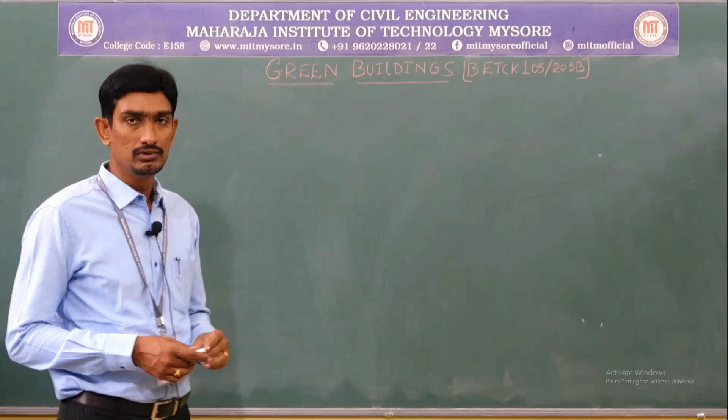Today I am here to discuss the course on green building, which is an elementary course in engineering that we are going to teach from our Department of Civil Engineering. In module 1, 2, and 3 of green buildings, we discussed the various materials to meet the green aspects, the various techniques adopted to meet the green environment in buildings, and the causes of global warming and critical issues related to it.

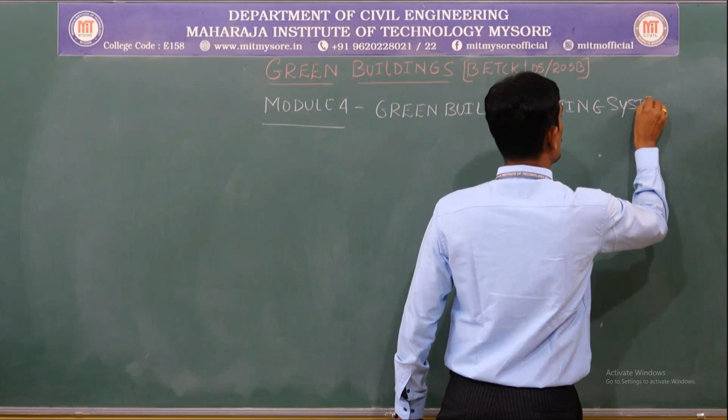Now, moving on to module number 4, this module deals with the green building rating system. In this module, I am going to teach you how to rate a building, or how we can say the building has attained the green aspects, and how to assess whether a particular building is reaching or attaining the green aspects or not.

So in this context, what are we going to discuss? Coming to the contents of this module, I will introduce what exactly the green building rating system is and how we need to attain it. Next, I am going to discuss the various assessments - what are all the rating systems or assessment systems available to assess green buildings. I will discuss this with respect to the Indian context and also the global context.

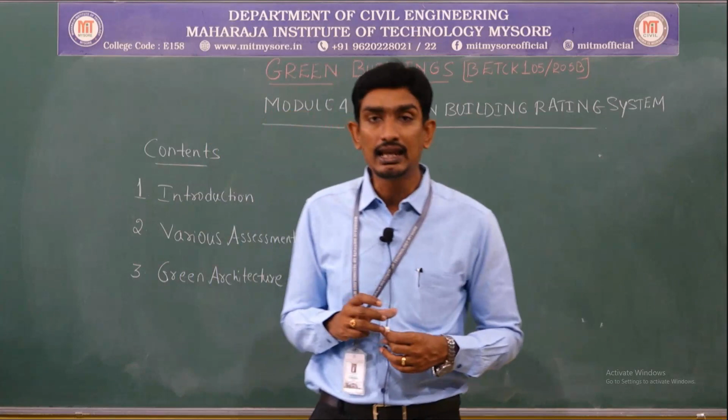Next, after this, I am going to discuss a very important aspect - green architecture. That means if I want to meet the green aspects or green environment in a building, or accommodate these principles in green buildings, how do I need to manipulate or modify my building to meet the green or sustainable aspects. These are the contents I am going to discuss in module number 4, the green building rating system. Let us go one by one.

So first, let me start with the introductory part, as I stated. For 4.1, module number 4, the first topic: introduction.

Hope you know that these days there is a lot of urbanization happening, and more construction is happening because of this rapid urbanization. The construction aspect is also increasing because village people are now moving to urban areas. Because of this movement, they need a basic need, that is shelter, and because they want shelter, the construction aspect is also increasing.

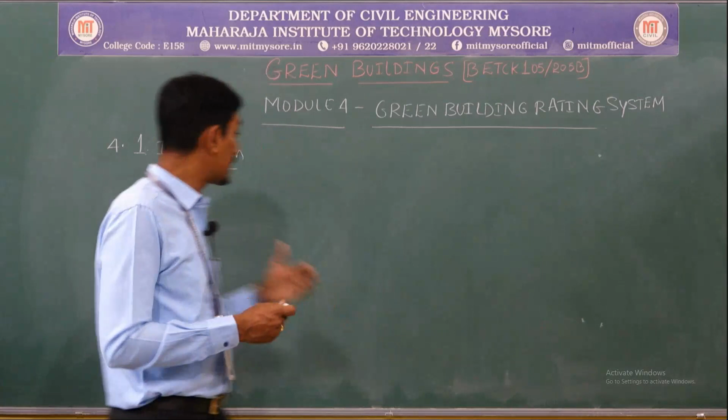Another thing is infrastructure-wise. Because of this rapid urbanization, infrastructure is also getting expanded. For example, take Bangalore - earlier there was no metro, no increase in the boundary area. Now you can see all this has increased - the metro has come, flyovers have come, and the area has increased, because of more urbanization and more movement of people from one place to another.

Because of this rapid urbanization, construction is also increasing. In this particular course, I am going to concentrate only on buildings. I am not talking about infrastructure, because as my course name itself says, it is green building - I don't want to talk about infrastructure, I will talk more about buildings.

So now coming to the building sector - as I told, because of rapid urbanization, the building sector is growing rapidly because of this urbanization. Buildings are increasing day by day, and more construction is happening.

This building sector is increasing rapidly. Because of this, it is contributing immensely to the growth of economy also. Because of this rapid increase in building sector, or rapid construction activities, the economy of a country is also increasing. So that is a good perspective or a positive point. This augurs well to the country.

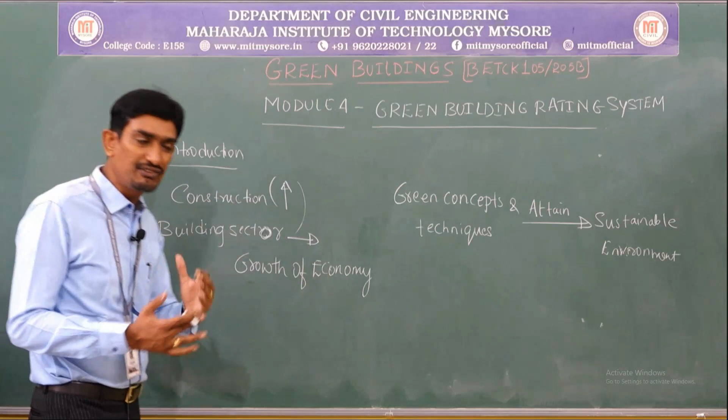Because of increase in building sector, the construction activity is also increasing. Because of this increase in construction activities or building, it will lead immensely to the growth of economy. This will augur the wellness of a country, which means I need to contribute more upon the green concept and techniques, which will attain the sustainable environment.

Now, what green concepts and techniques do I need to talk about? These green concepts and techniques need to address the more national issues. The national issues - what are they? That is, water efficiency, energy efficiency. So these are the national issues I need to address.

Not only this, the very important thing is reduction of fossil fuels, and handling the waste, and conserving the natural resources. So these are the national issues I need to address in order to attain this green concept and techniques, finally to meet the green building.

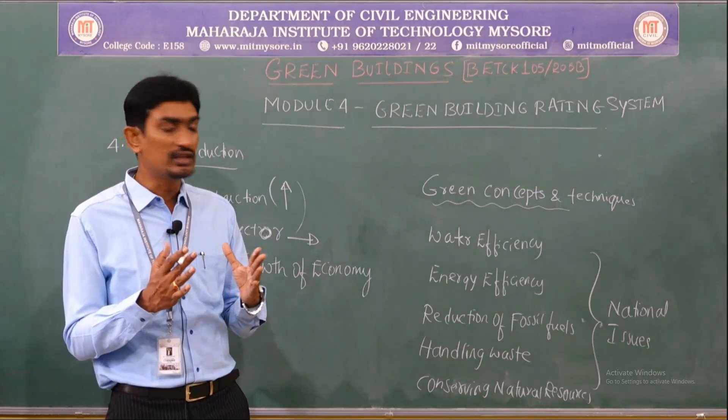Water efficiency is a major crisis now because in our home, how effectively or efficiently we are using the water - for bathing purpose, cooking purpose, washing purpose, cleaning purpose, we are using water. How effectively or efficiently we use this water plays a role with respect to national issues. We should not waste water because it is a precious thing we need to preserve for our future. So efficiently using the water is one of the green concepts and techniques we need to inculcate or adopt in order to attain the green building.

Next, coming to energy efficiency. For example, I will take a small example. In our household, we used to switch on the lights, fans and all. By switching on the light unnecessarily, it will be waste of energy. Simply we are wasting energy. So how effectively are you converting those?

What I'm trying to say is, nowadays, in order to meet the green aspects - I think they have been discussed in module 1, 2 and 3, especially module number 3 - inculcating or imparting solar energy in the building. That means converting solar energy to electrical energy. Converting solar energy into electrical energy conversion is one of the important aspects of how we can effectively use the energy.

By switching on the light, fan, we are consuming a lot of energy. So that's why how effectively you are preserving energy is very important. That is another issue we need to address.

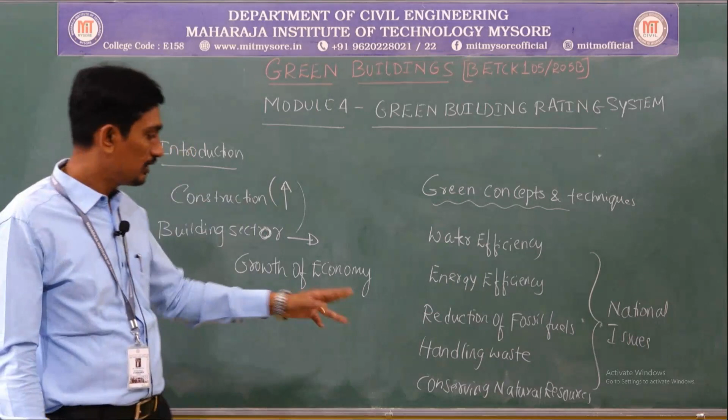Next is conserving natural resources. That means we need to preserve our nature. Then only we can showcase sustainability. Sustainability is defined as meeting the present demand without compromising the future.

With respect to the building context, we need to preserve stones and river sand. Nowadays in construction practice they are not using river sand, because it is a natural resource we need to preserve, otherwise it will lead to imbalance of the environment.

Likewise, we need to preserve the hilly areas, that means the stones. If we keep on doing the quarrying process, we are completely spoiling the environment. So all these things we need to think of and preserve. These are the various national issues we need to address with respect to these concepts. Then only we can attain the green building.

Because these are one of the criteria we are going to look at in order to assess or rate the green buildings. Anyway, I am going to discuss these during the assessment, but in general, these are the criteria I am going to look at in order to rate the green buildings. Is it clear?

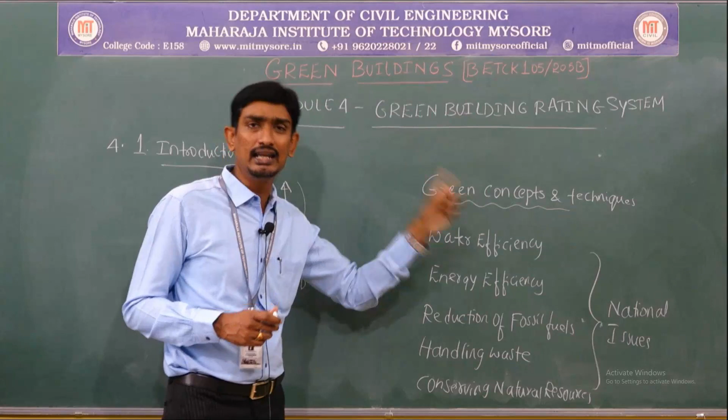So next, with all these things, now let me define what exactly green building rating systems or green building ratings are. So we need to define that. Okay, let me go ahead. Green building rating system. Green building rating systems — I use it as plural, that is systems, because so many systems are there. That's why we call it systems instead of system.

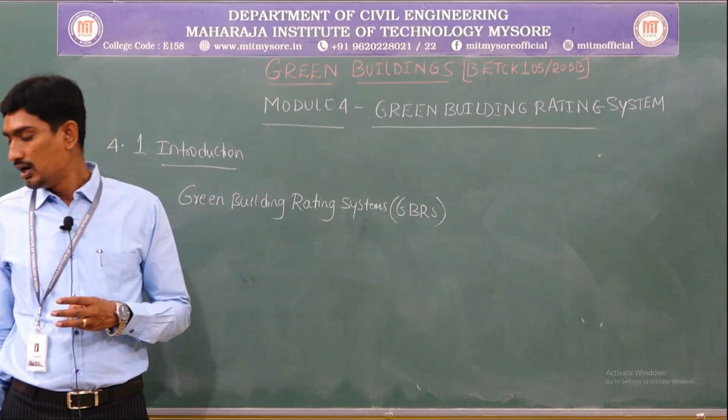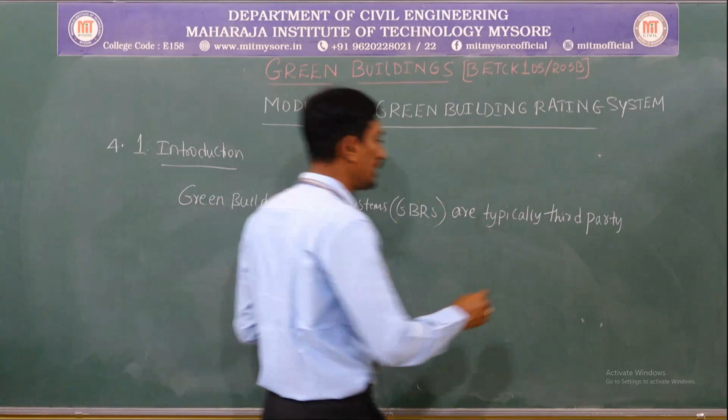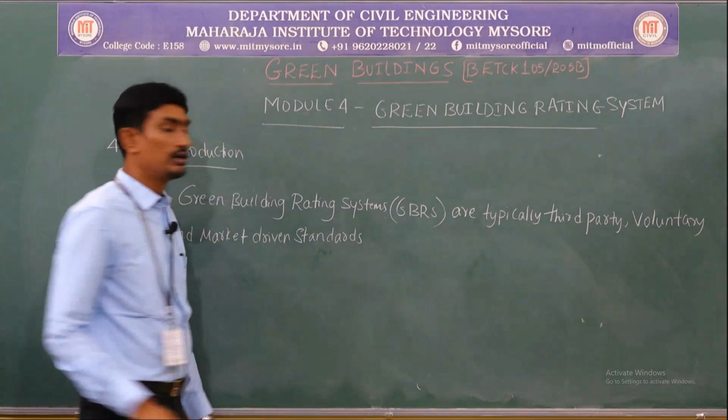So in short, GBRS, green building rating system. What exactly is it? Typically third party, voluntary, and market driven standards.

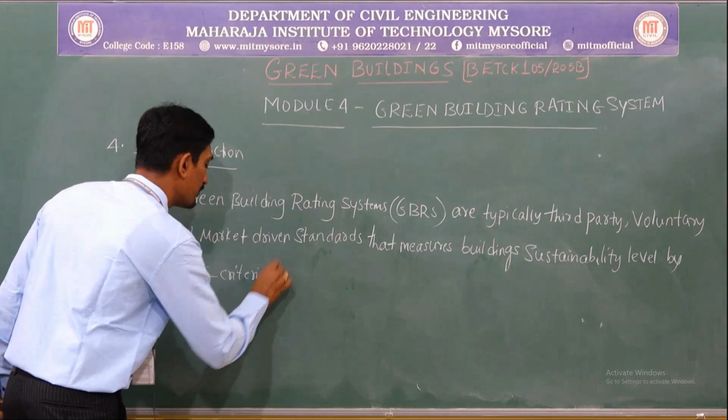Market driven standards that measure buildings' sustainability level, because the final aim is we need to measure the building, since we are only talking with respect to buildings, not any other structure. Buildings' sustainability level by multi-criteria assessment.

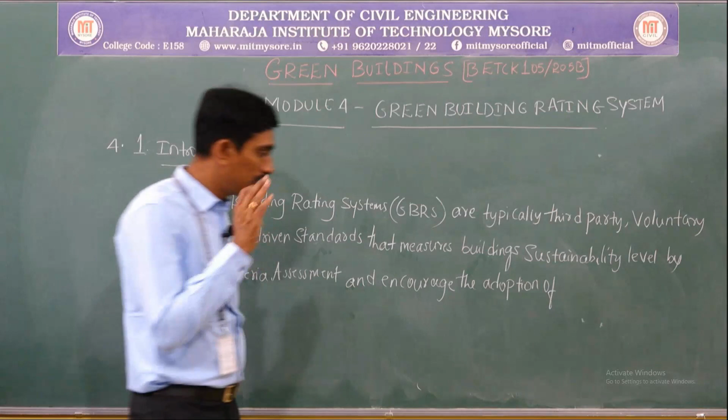It's a very lengthy definition: and encourage the adoption of the three triangles which we discussed in the previous module, that is sustainability — the adoption of environmentally, socially and economically sustainable practices, because these are the triple triangle. I think in sustainability we need to think of these: environment, social and economical. So when we want to attain the sustainable environment, we need to look at these three aspects.

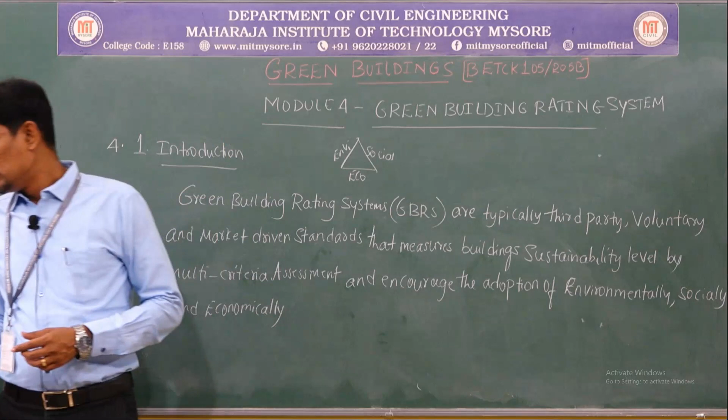So in social and economical, sustainable practices — where? In the design, during the design, next in the construction, and there is no end for this, and also in the maintenance of the building.

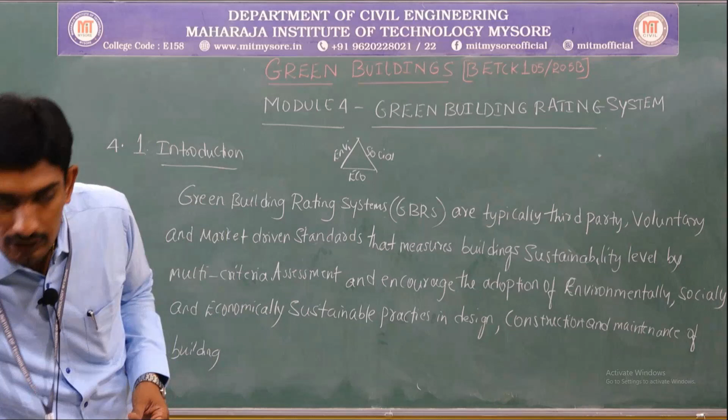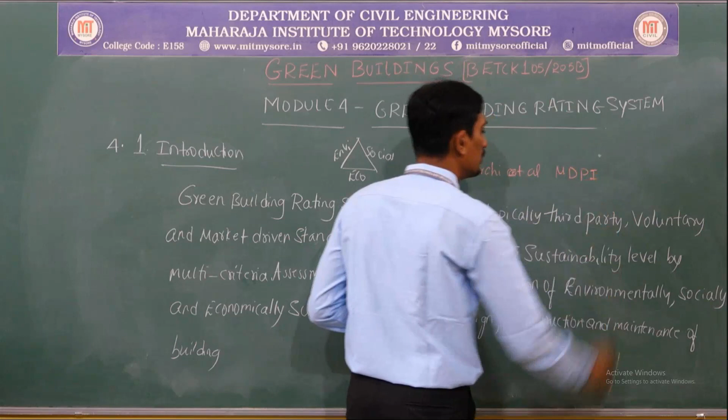This definition I picked from one of the famous persons who has done the research, Lia Marchi et al., from the journal paper MDPI. I picked this very fantastic definition which I can explain very well. So you can see here, green building rating systems are typically...

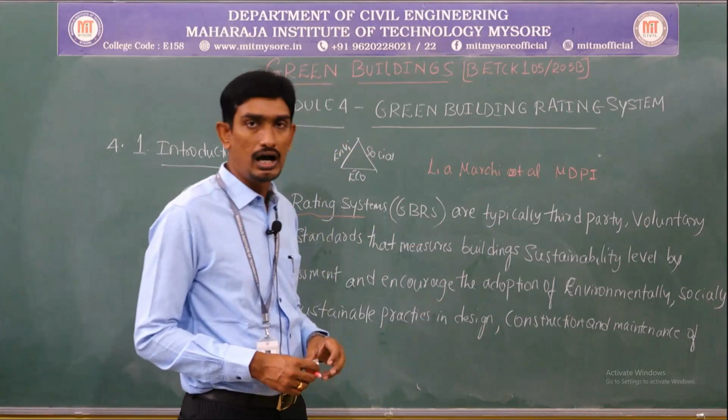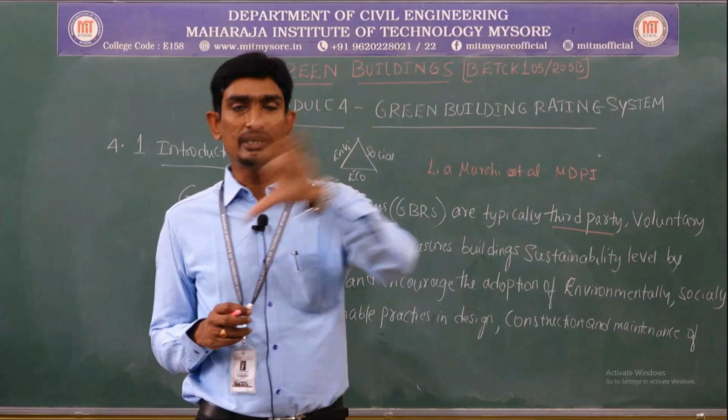Third party — that means the client and the contractor will be there, and apart from these two persons, the third party. For example, one who constructs the building is called the contractor, and one who is going to get the building constructed is called the owner. The other person who is going to evaluate the building — whether the contractor has done it properly or not — that is called by the owner as the third person, which means me. He is not going to call the contractor. So in order to certify the building constructed by the contractor, I am the third party. That is what third party means.

Voluntary means voluntarily. And market driven standards means we have got certain standards for how to assess, which I am going to explain in the various types of assessment techniques. So market driven standards, voluntary standards, and the third party.

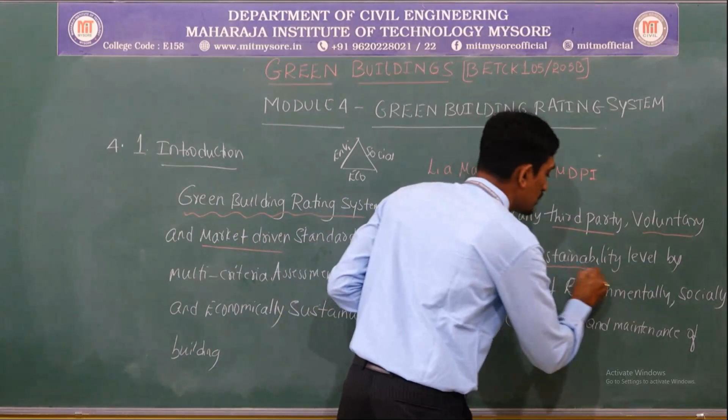So this third party, voluntary and market driven standards measure building sustainability level. So all these standards are used to measure the building sustainability level. Building sustainability means meeting the present demand without compromising the future. That is what sustainability level means.

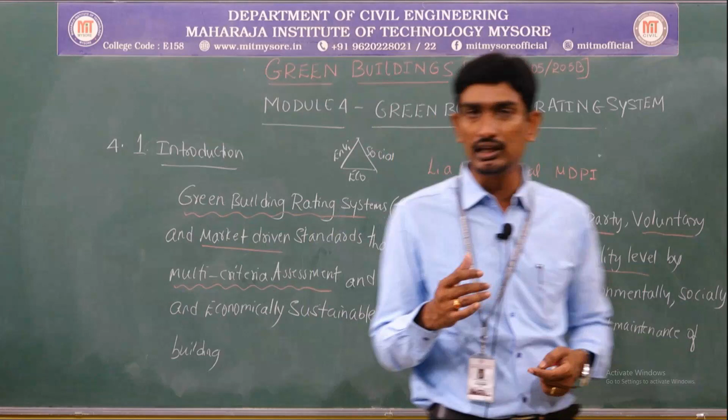By multi-criteria assessment, as I mentioned. Multi-criteria — I think in the previous topic I discussed what multi-criteria means. It means water efficiency, energy efficiency, fossil fuels, and so on. Sometimes they use a single attribute, like water or energy alone, and sometimes we go with multi-level — apart from water efficiency and energy efficiency, how much natural resources have been conserved, how much fossil fuel has been used, how effectively you are handling the waste.

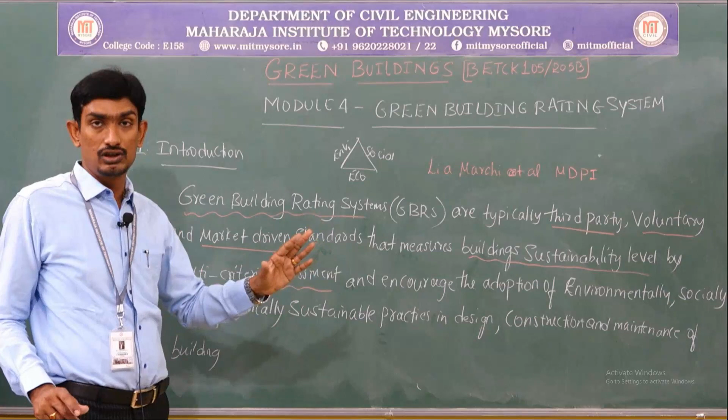So all these things are criteria: water efficiency, energy efficiency — whatever assessment or rating system I am going to do for the green building, that is the criteria. This criteria will differ for various assessment systems, which I am going to talk about.

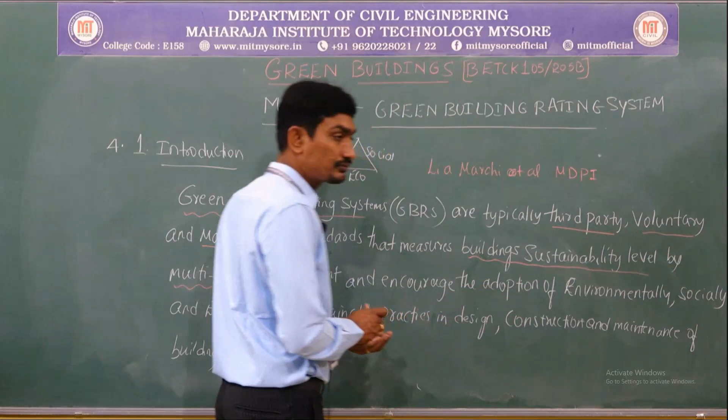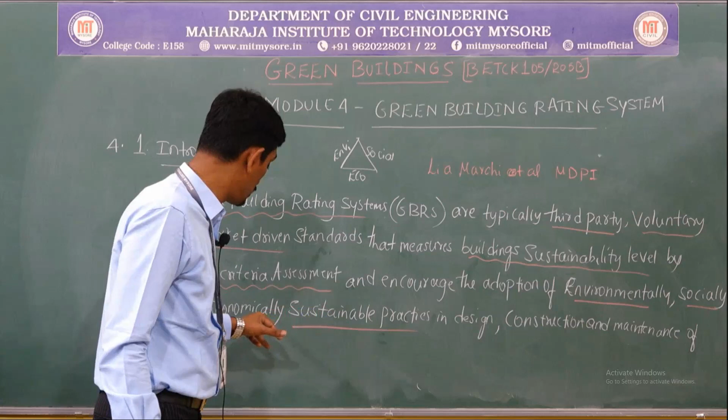Encourage the adoption of environmentally, socially and economically sustainable practices. That's what I have been told. I am measuring the sustainability level in terms of whether this building is contributing effectively with respect to environmental, social, and economic factors. Did you get my point? So these are the sustainable practices, how this green building is contributing, that is what the sustainability levels mean, in terms of multi-criteria assessment in green buildings.

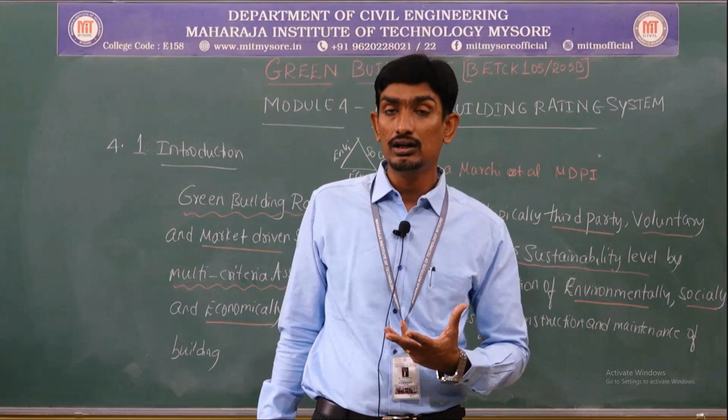And this I will assess from the inception, not only design. We are going to rate the building based on how exactly it has been planned. For example, if I am going to construct a building, how much sunlight and air you accommodate inside so that the user or occupants can comfortably live inside. That is a very important criteria, that is planning.

Orientation of your building is very, very important. I am going to discuss orientation and design in this module, and you will also discuss some of these things in module number 5. So the planning stage itself, from the inception, we need to orient and plan the building in such a way that it will contribute more towards environmental, social, and economic sustainability levels.

I told a small example, orientation, meaning how effectively the sunlight and fresh air can come inside. Otherwise, if you construct the building without allowing natural light and air to pass inside, without proper space or proper windows, what happens? You automatically feel suffocated inside. So what am I going to do? I'm going to switch on the fan, switch on the light, consuming more energy. Did you get my point? These are the things we need to concentrate on, planning and orientation of your building.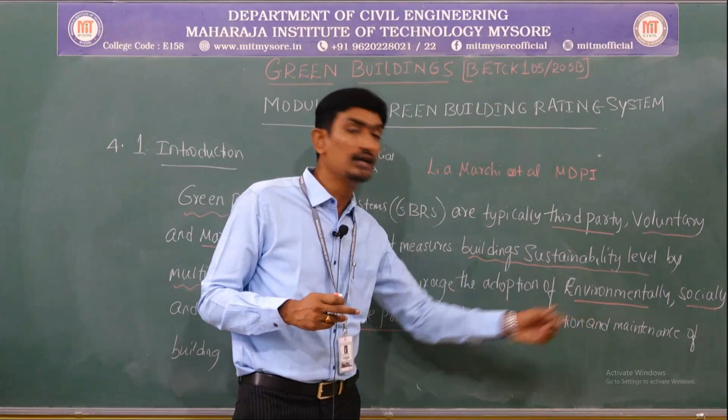Finally, the green building is not going to end at the planning stage or design stage. Okay, fine, I have manipulated my building, designed it, constructed it with a rat trap bond wall, filler slab roof, everything. My job is over? No. The green building aspects will not end there. They will continue during the maintenance stage. This is a very, very important stage. I think in module number 3 energy levels have been discussed.

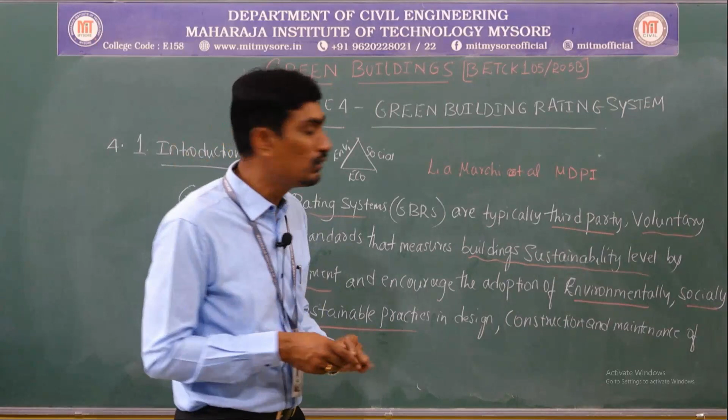Embodied energy, how much energy you are consuming. If I want to quote an example, I will repeat this: we are consuming or utilizing more energy during the maintenance as compared to design and construction. This is a very interesting scenario. Design and construction, I can quote 30%, and maintenance 70%. So that's why operation and maintenance is very, very important.

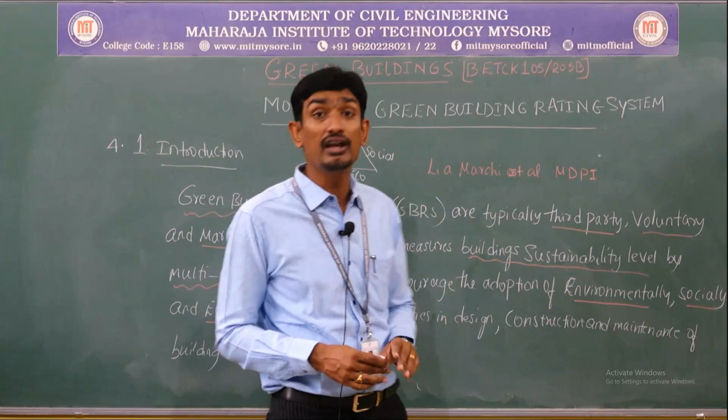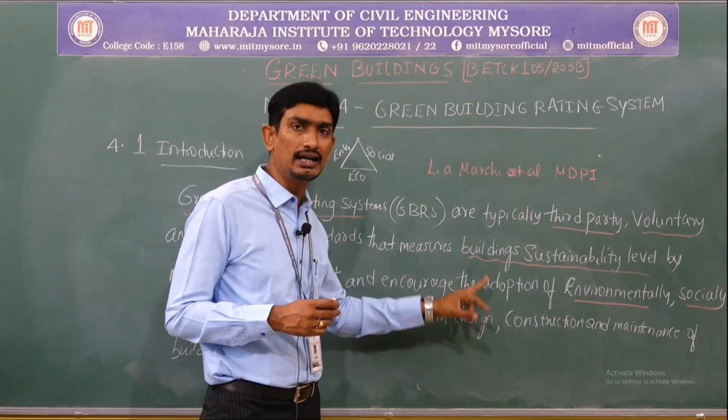I will just take a small example. See, that's what I have been told. If you accommodate or properly plan and design the building so that natural light and natural air can pass inside, and construct with proper eco-friendly material, then the operation and maintenance cost will bring down or reduce.

If you didn't do the proper orientation or design, and if you go with more concrete, more high density materials, then occupants will not feel comfort inside the building. Automatically the maintenance and operation cost will increase. How? Switching on the light, switching on the fan, switching on the ACs. Did you get my point?

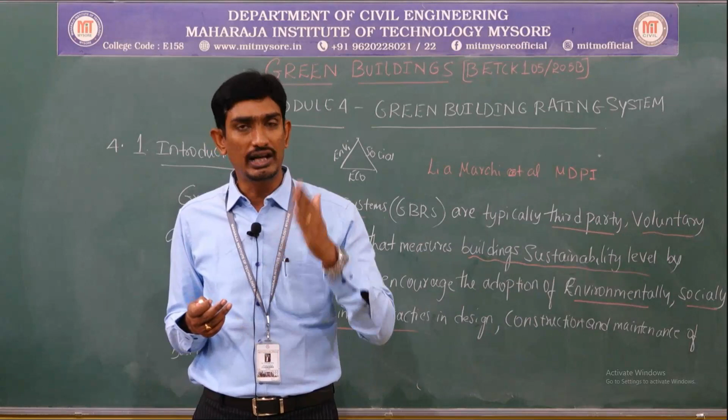So that's why we need to modify the building. In module 5 you are going to learn about this, one concept called trombe wall. I think in Western countries they are following this technique, trombe wall practices. What is this trombe wall? The trombe wall is two glass facades, two glass panels.

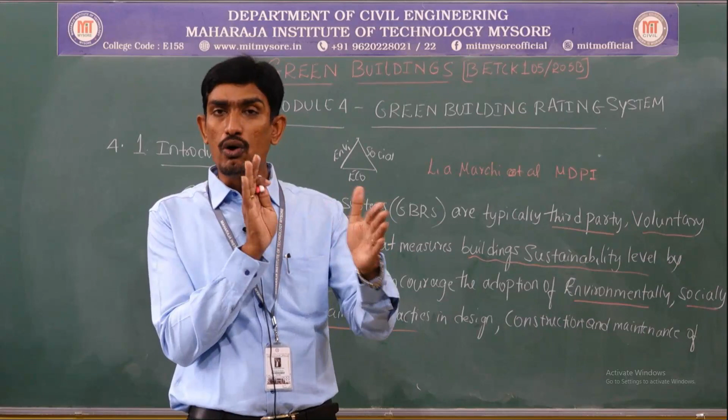They are going to accommodate and orient the building in such a way that the sun will allow the rays to pass. Whatever rays come from the sun will be collected in these glass facades. I am going to orient the building so that natural sunlight is collected during the daytime, and then at the other side, when the sun sets, by collecting that solar energy, I can operate inside the houses or building. That means conversion of solar energy into electrical energy effectively.

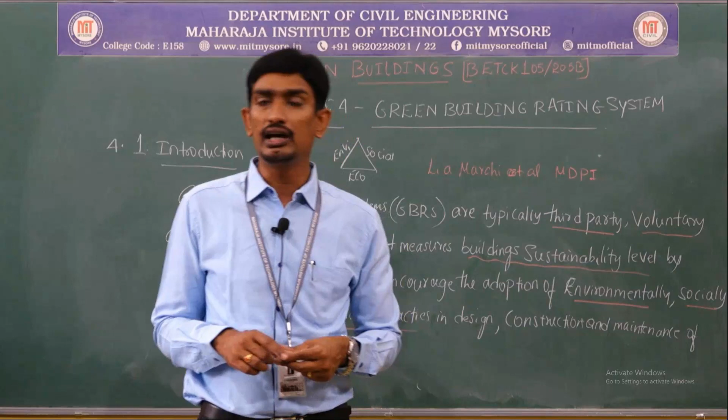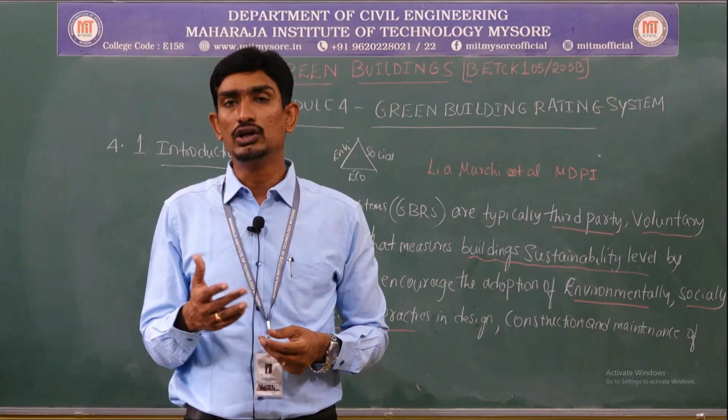Also in Western countries, buildings are subjected to freezing and thawing conditions, going up to minus 40, minus 20 degrees or something like that. So what they need to do in this condition is switch on the heater inside the building. In order to avoid this, they can orient the building to collect the solar energy, so that it can release the solar energy during the night time. By this we can bring down the operation and maintenance cost. So this is the way.

All these levels I need to assess, and then I need to rate. So this is what multi-level assessment system, multi-level criteria assessment system, or multi-criteria assessment system. Everything I need to look at: how they have been planned, how they have been designed, what materials have been used in construction, whether they are consuming natural energy or using lights and fans during the daytime also. All these things I need to assess in order to rate the green buildings.

So this is the definition, a fantastic definition I have picked from Lia Marchi et al., from MDPI, a very good journal. They have defined it very beautifully. There are so many definitions, but either way it is one and the same.

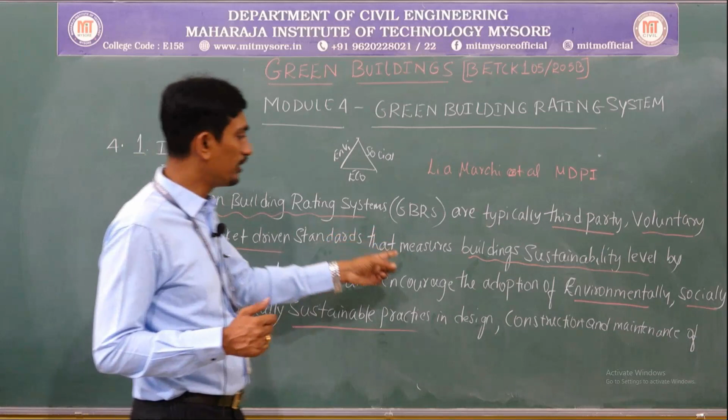So I will repeat, the green building rating systems are typically third party, voluntary and market driven. India has got certain standards, US has got certain standards, UK has got certain standards. Based on those driven standards, I am going to measure the building's sustainability level, through multi-level criteria assessment or multi-criteria assessment, that is water, energy, fossil fuels and all, and encourage the adoption.

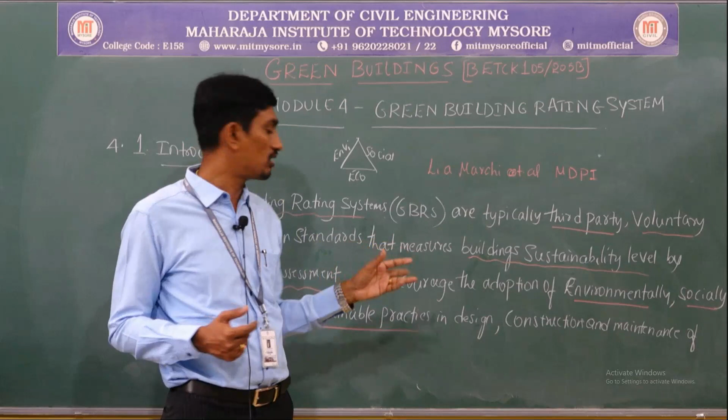Assessment is not only just judging, we can also give some ideas to the people. We can say, you can do it like this. That's what is called adoption, encouraging the adoption of environmentally, socially and economically sustainable practices. Economically, if you adopt these techniques, automatically your operation and maintenance cost will also bring down. That is sustainable practices where design, construction and maintenance of buildings are concerned.

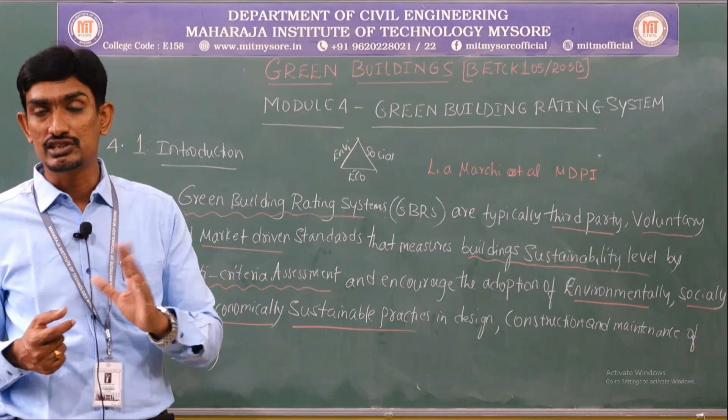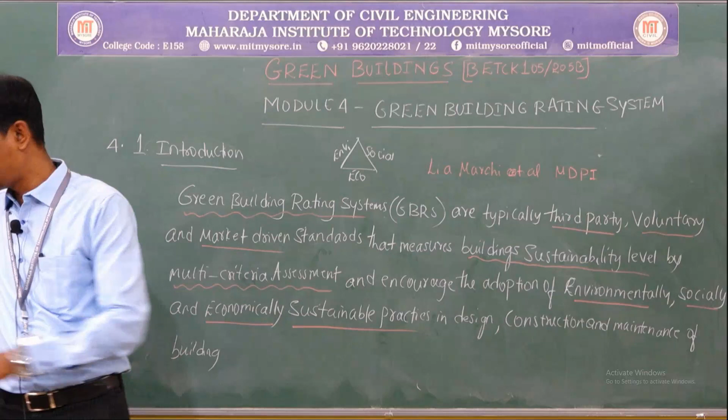So this is with respect to the green building rating system definition. Hope you understood what exactly I am going to do. Did you get my point? Okay, so now we will move on to the other aspects. These are very lengthy definitions, but hope the concept is clean and clear.

This certification system will be broadened in such a way that it will consider the whole project itself, not as a product, but a complete building. I am going to do the certification for a complete building. Next, the performance level, how this building is performing, all those things I am going to assess. The next thing is this green building rating system is an integrated design approach. This is another way I can define the green building rating system: an integrated design approach.

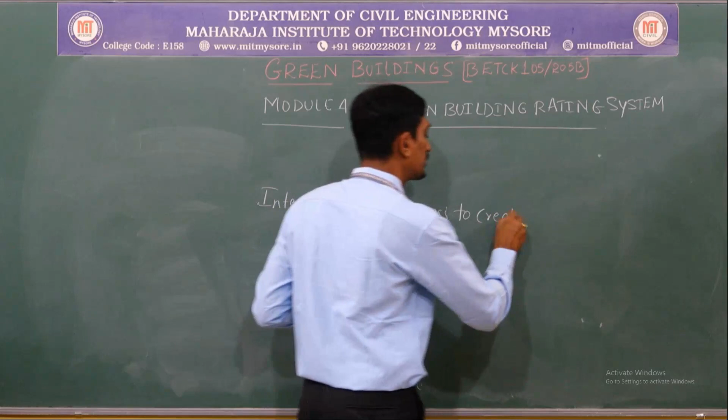Design process - I can say integrated design process - to create projects, that means buildings, that are environmentally responsible and resource efficient.

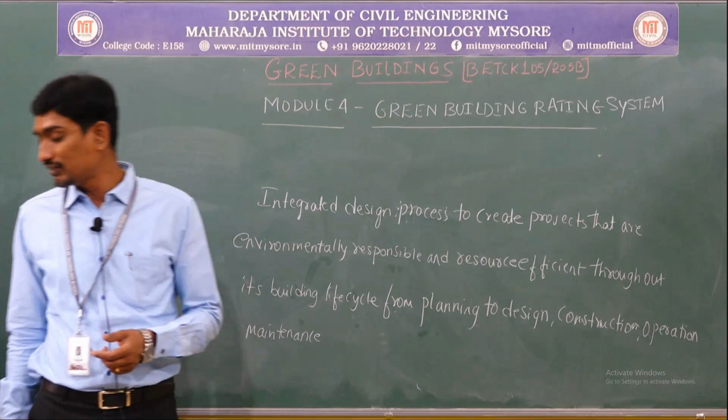Now the very important word I will use is throughout its building life cycle. What is that life cycle? From planning to design, next construction, operation, maintenance, and not only maintenance - renovation and demolition will come here too.

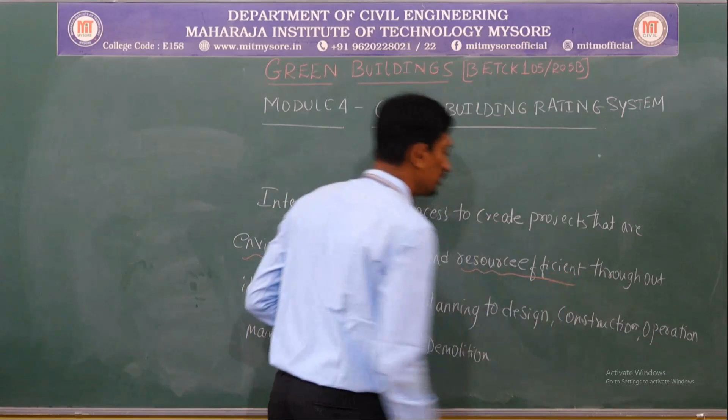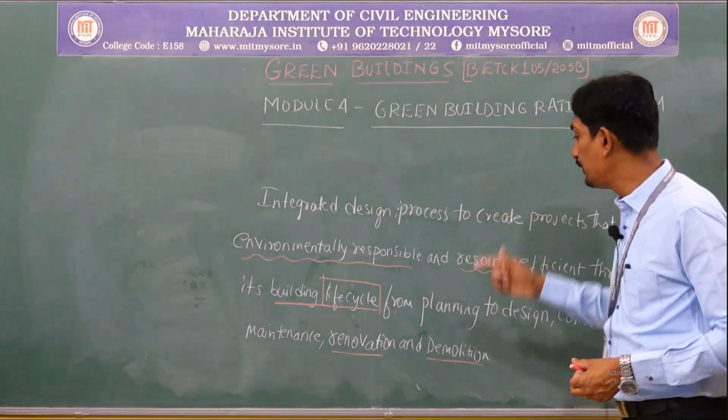So now let me define. The green building rating system is an integrated design process or approach to create projects, or green buildings, that are environmentally responsible and resource efficient, meaning it functions effectively in water and energy use, throughout its building life cycle. What is the life cycle of a building? It starts from planning, then design, then construction, then operation, then maintenance. Not only this, the end of the life of a building - that is renovation and demolition also. It starts from planning and ends at demolition. So till that stage, this building should be environmentally responsible and resource efficient.

Now, how exactly does it contribute with respect to renovation and demolition? For example, if I am going to demolish or renovate this building, I need to use lesser energy - that is the first thing. How can I recover that material and reuse it for the next stage of construction? And how effectively can I demolish that building without damaging the neighborhood? That means it will not create any harm to other buildings or to the environment - that is what environmentally responsible means. How effectively you demolish the building will also contribute to the rating system. That is the complete life cycle, starting with planning up to the demolition stage.

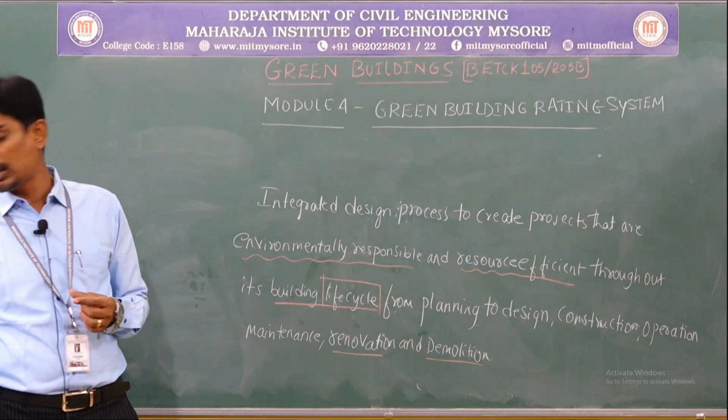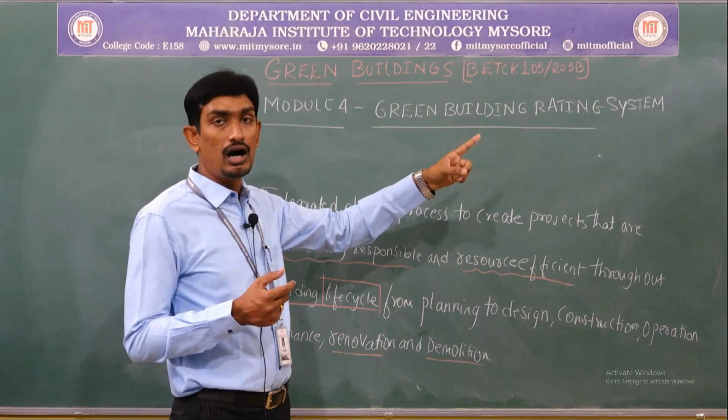So this is another definition. Usually the Indian Green Building Council, IGBC, which I am going to discuss, also states the same thing - that the green building rating system or certification system requires an integrated design process to create a project or building that is environmentally responsible and resource efficient throughout its building life cycle, from planning to design, construction, operation, maintenance, renovation and demolition. So it is a complete life cycle. What we understand now is that I am going to do the assessment, rate the system, or do the certification to the green building from the inception - that is from planning up to demolition. This is the principle I need to follow in the rating system.

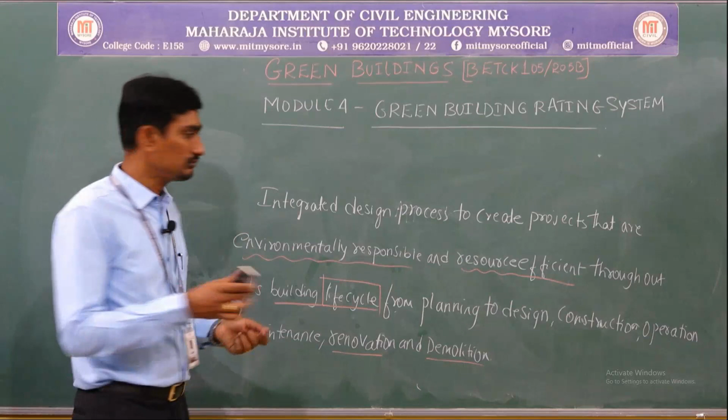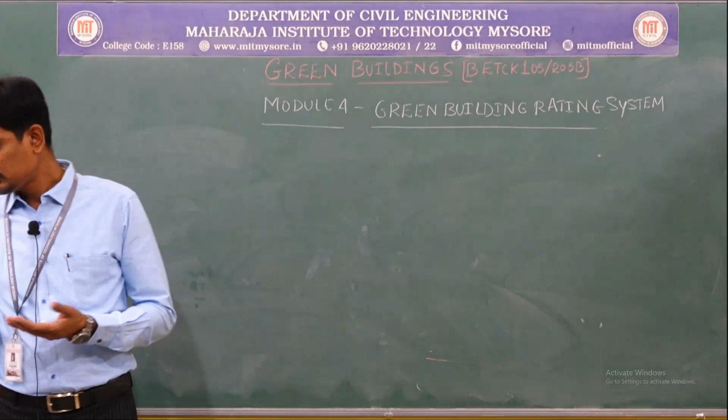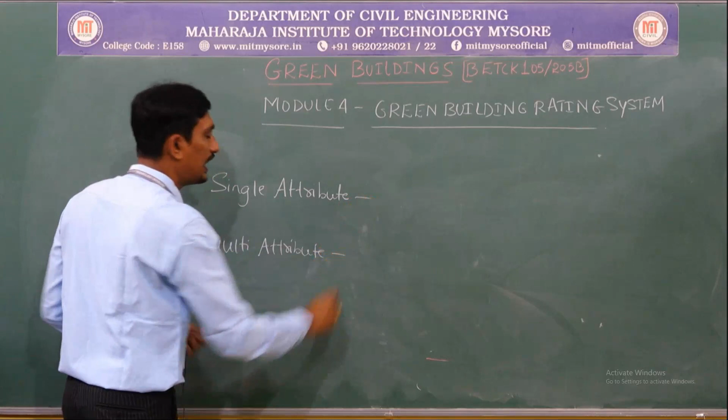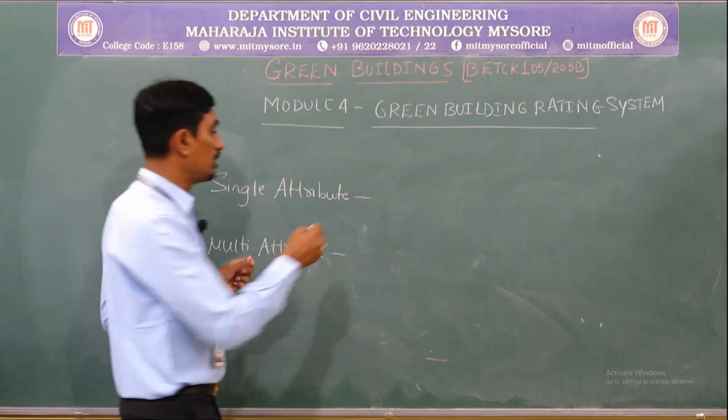Next thing - there's a concept called single attribute certification system and also multi-level attribute, or multi-attribute system. What is single attribute system? That means I am going to do the performance evaluation of a green building, or certification, based upon one attribute - that one attribute is either water or energy, that is water efficiency or energy efficiency. That is what single attribute assessment level means.

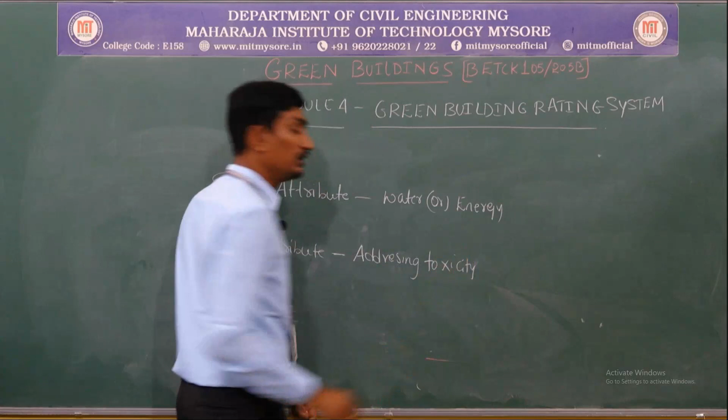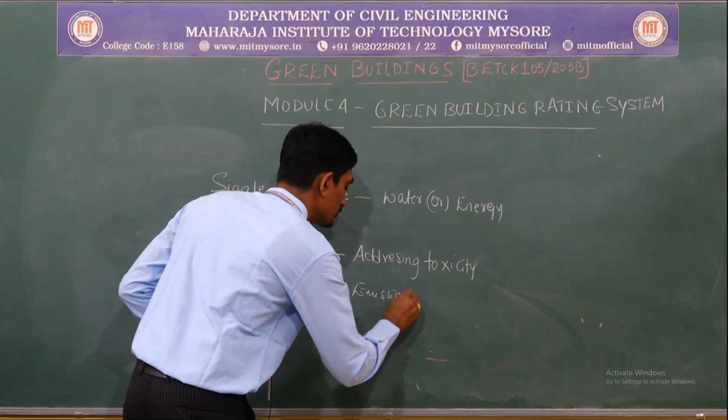Multi-attribute means addressing various issues - water efficiency, energy efficiency, addressing toxicity also, waste management, the use of fossil fuels, the emissions from the building, and environmental performance.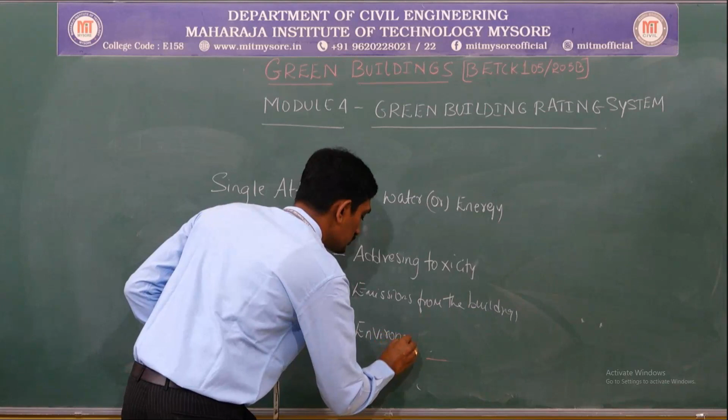So all these things are multi-level assessments, that means it is one and the same. Waste management, water efficiency, energy efficiency, how effectively are they managing the waste - all those things are multi-attributes in a single assessment. That means attribute means the levels.

For example, if I am going to assess the building, what is the attribute I am going to look at? First, how effectively is this building using resources, whether they are discharging waste properly, what they are going to do after discharging, whether following the proper procedure or not. These are the levels I am going to discuss, for waste or energy. All these things I am going to teach you next, in the assessment levels.

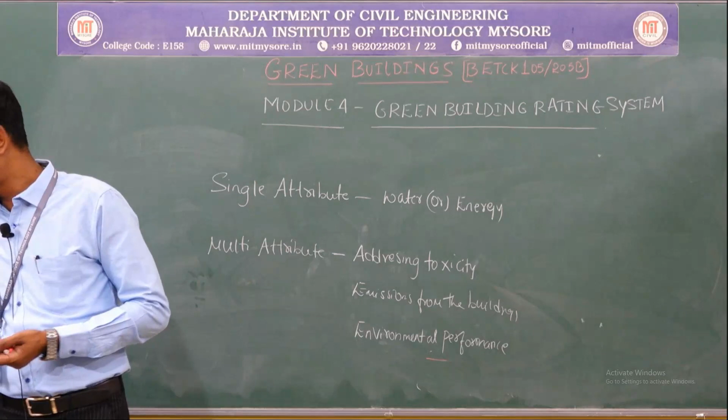Next thing is, now I am talking about the buildings. If I am going to classify the green building rating systems, the green building rating system, I am going to do the assessment.

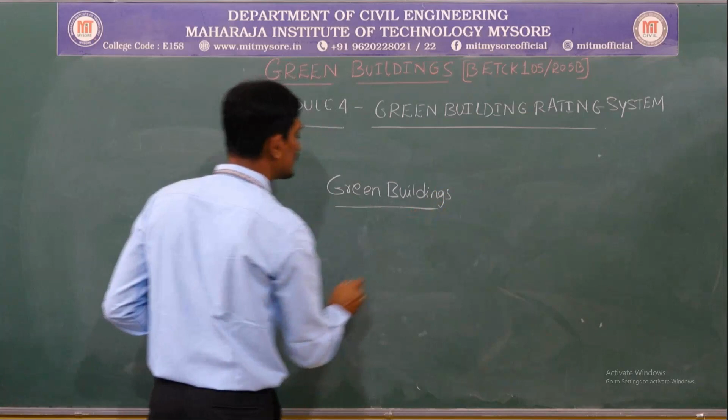For both types of people - generalized I will say, and in the next class I will say in the technical way: residential buildings, and also commercial buildings.

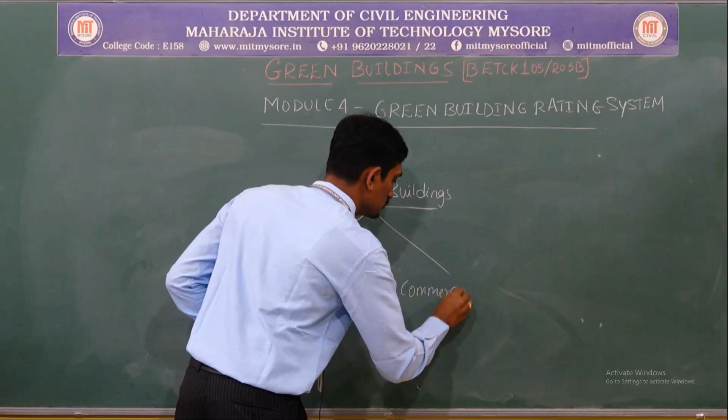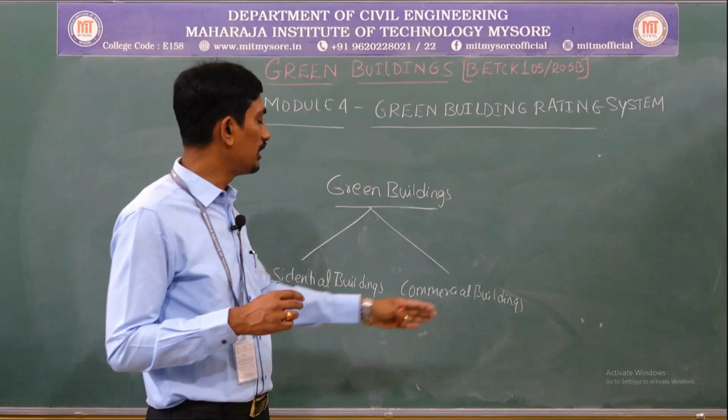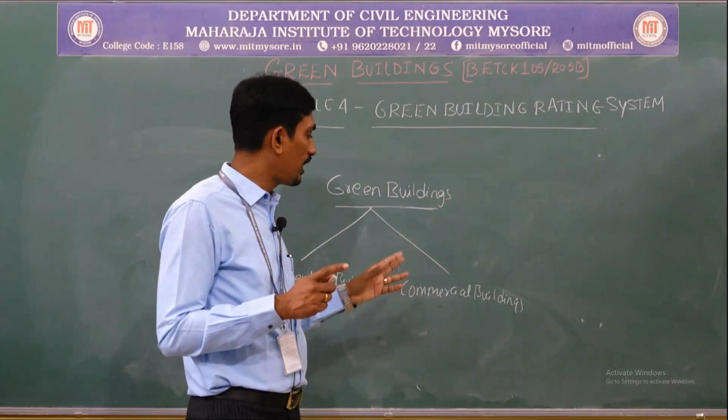Residential buildings - that means the assessment level or rating system for residential buildings versus rating system for commercial buildings will be entirely different. Whatever principles they use, for example in the waste management principle, commercial buildings will be different from residential, because the occupants will be different. In commercial buildings the people who come will be more, and in residential buildings the occupants are very less. Based on that, the certification level or rating system will also vary.

Next, coming to the principles - what are the principles I need to look at in order to do the rating system? What are the principles I need to follow when I am going to do the assessment system, the rating system? So number one...

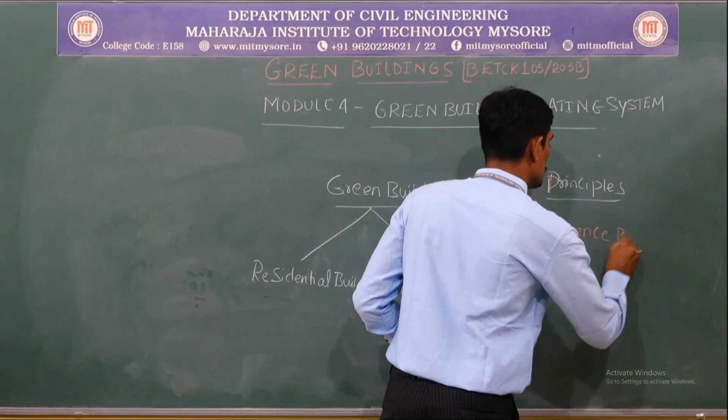Science-based. What is the meaning of science-based? Whatever results and discussions have been obtained from the assessment, that must be reproducible by others using the same standards. That is what science-based means - we have a set of standards, as I've told you, market-driven standards, voluntary standards.

Next thing is, it should be transparent. Whatever assessment I am going to do, whatever standard or process for awarding the building I am going to follow, that should be transparent. I should not hide anything - that is what transparency means.

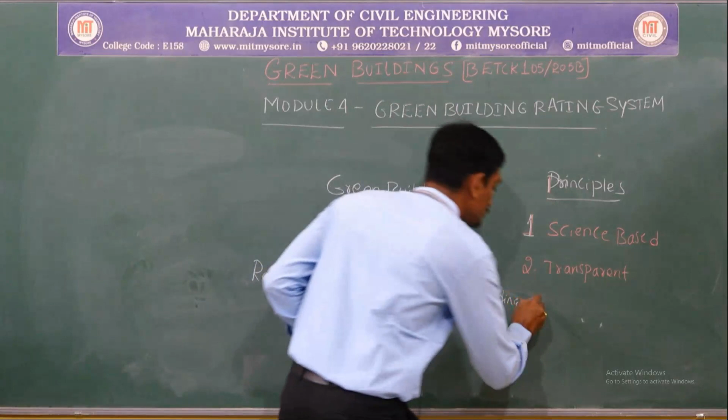Next, objective. What is the meaning of objective? Objective means I should have a proper aim. I should not have any conflict - the certified body or certification body should not have any conflict. I know my objective, what I should do. That is the principle I need to follow, that is the objective.

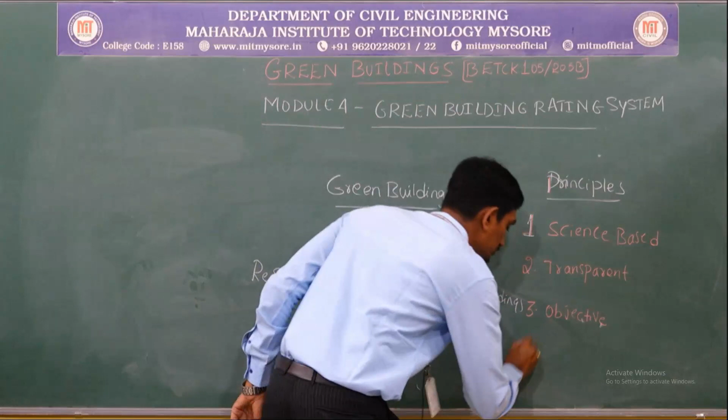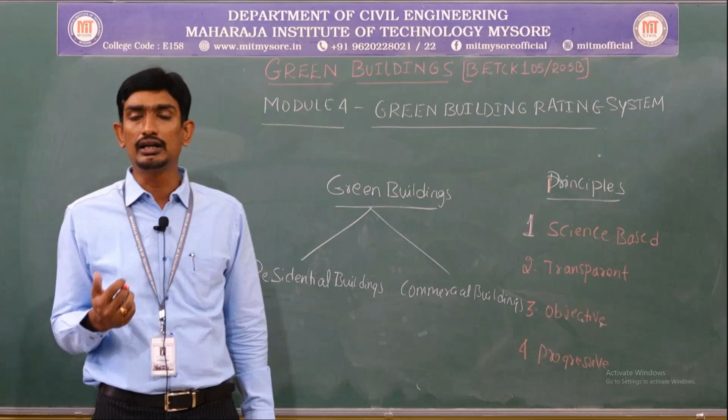Next, it should be progressive. There should not be any end in the rating system. What is the meaning of progressive? That means the standard should follow advanced industry practices - whatever standards I adopt or inculcate should be industry standards or practices. Simply rewarding the building will not serve the purpose, as I've told you in the definition.

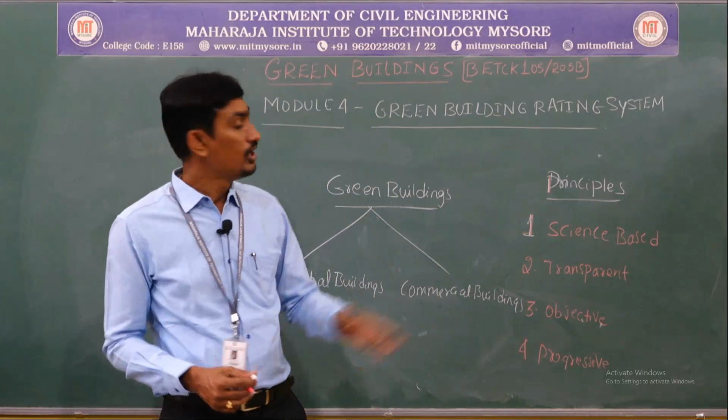Encouraging the adoption - we need to say, this is what you did wrong, you need to adopt this way so that you can attain or get more points on this, score more marks on this building. So that is the progressive way, we need to educate them also. So these are the 4 principles I need to follow during the rating system of green buildings.

So this is the introductory part which I wanted to discuss in this particular session, in the green building rating system. Hope the concept has been clarified, hope there are no doubts on this. Feel free to discuss if you have any doubts.

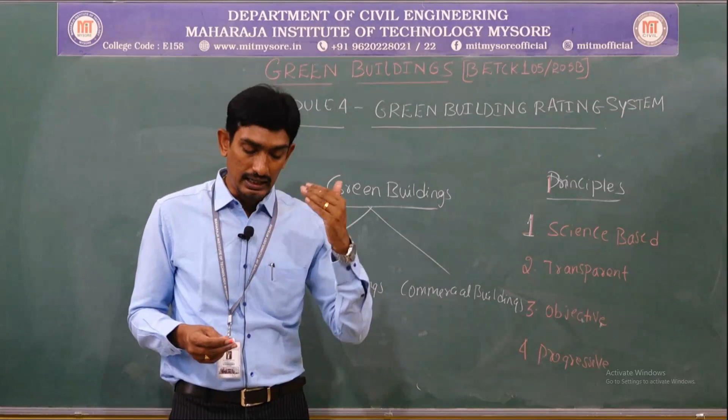In the next session, we are going to start with the various rating systems, or what are the multi-criteria assessment systems - for example, India, what is the multi-criteria? US, what is the multi-criteria? UK, what is the multi-criteria? Various countries will follow various assessments because in the worldwide context, the assessment system will not be the same, it will be different. So all those assessment systems we are going to discuss in the next session. Hope I have made you understand what exactly is the rating system in this introductory class. Thank you for listening.